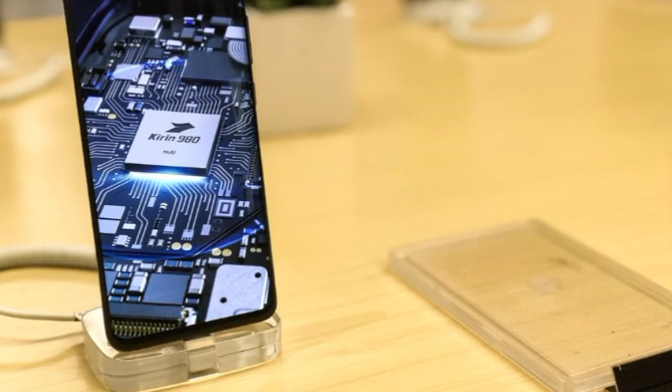In the later portion of Commerce Secretary Gina Raimondo's four-day trip to Beijing and Shanghai, Huawei Technologies Co. stealthily introduced a new phone dubbed the Mate 60 Pro on August 29, 2023.

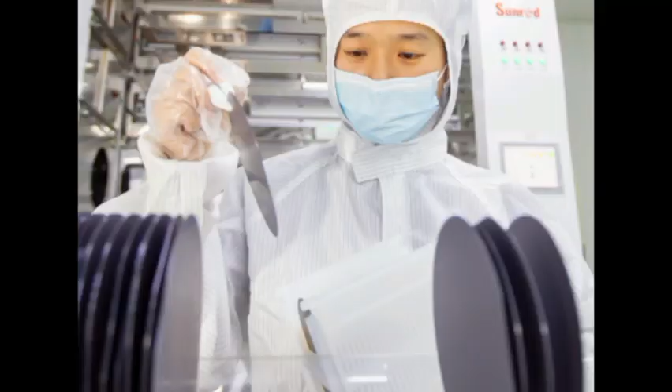A bombshell teardown of the Mate 60 Pro revealed that it was powered by a Kirin 9000 semiconductor chip manufactured in China by Semiconductor Manufacturing International Corporation. This meant China is able to produce 7-nanometer chips despite restrictions imposed by the United States, and possibly on a massive scale.

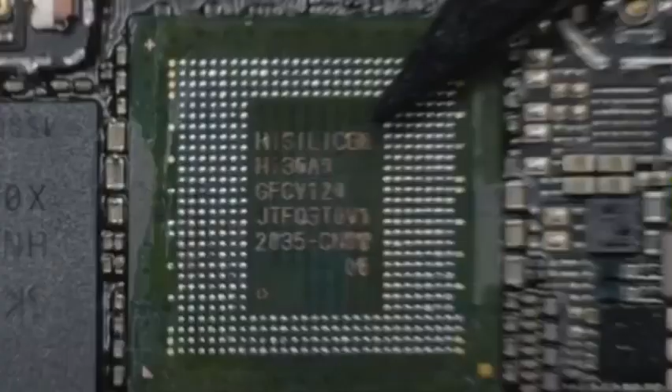Despite being introduced in a relatively unremarkable manner, the Mate 60 Pro went on to dominate the American news cycle the following week. Many in Washington concluded that the United States' efforts to restrict China's semiconductor development were fruitless as a result of this achievement, which caused widespread alarm.

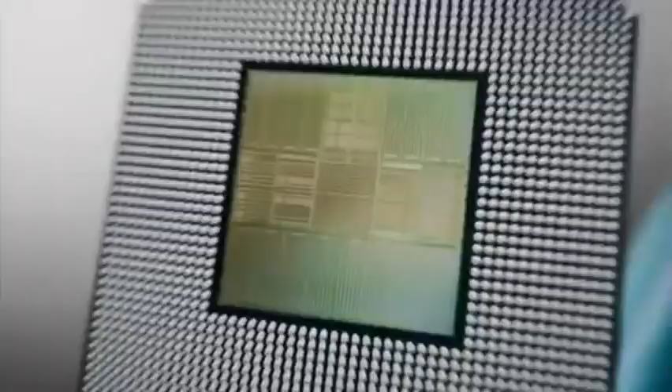In fact, the significance of the breakthrough made by Semiconductor Manufacturing International Corporation was considerably exaggerated. China was already well on its way to manufacturing 7-nanometer chips. It is more likely that Huawei's breakthrough will help recalibrate the Biden administration's approach going ahead than discredit it overall.

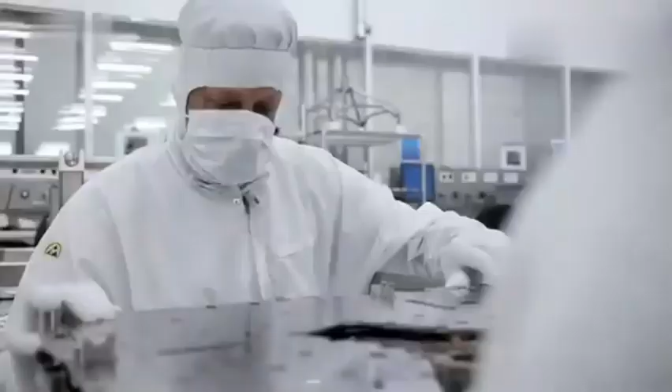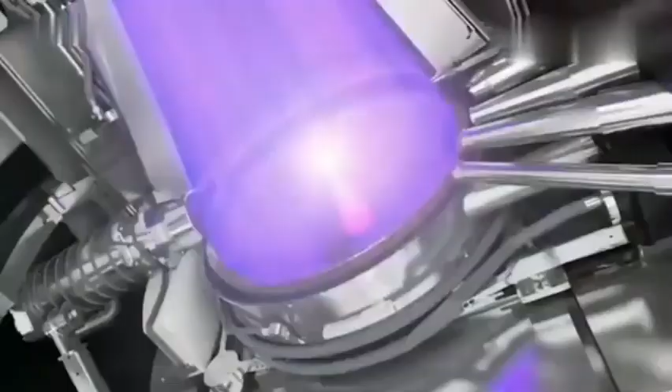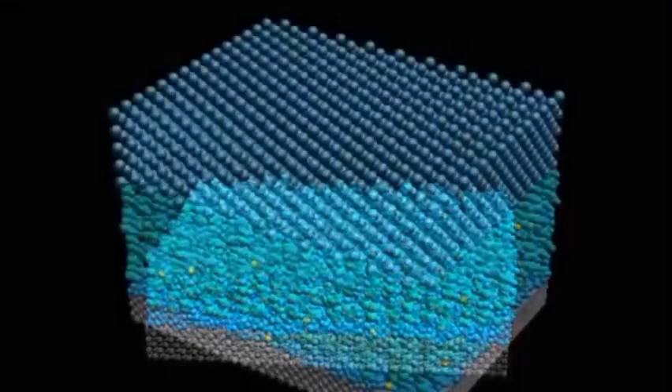To win the chip war with China, it is necessary to maintain a dominant position in advanced semiconductors, which are chips 8 nanometers or smaller, and to reduce reliance on Chinese legacy chips, which are devices 28 nanometers or bigger.

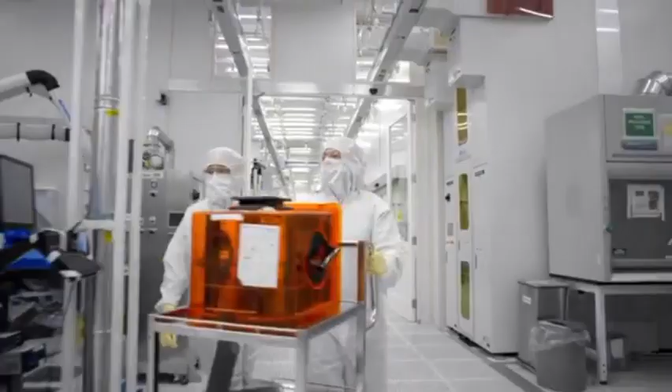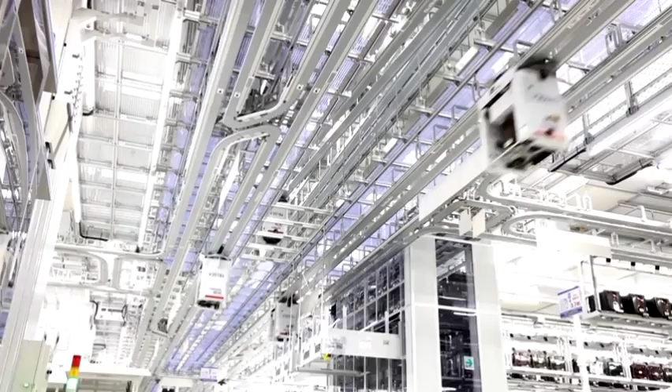Moreover, the United States government must keep an eye on China's increasing competitiveness in the legacy chip industry and formulate a response to it. Furthermore, if policymakers decide to further tighten chip restrictions in the near future, they should make certain these measures do not threaten the success of American semiconductor companies. What were the factors that led to China's breakthrough?

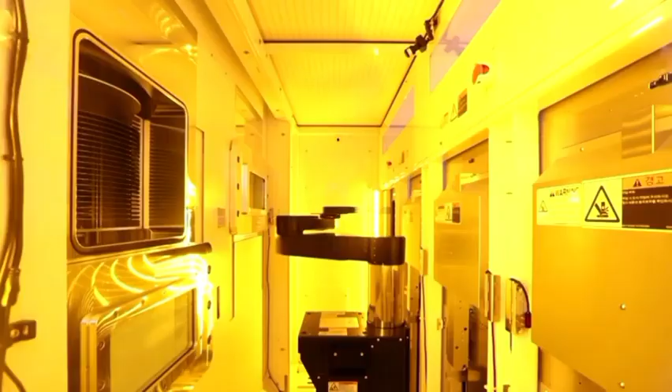In October 2022, the government of President Joe Biden imposed comprehensive export controls on China. These limitations prohibited the sale of specific advanced semiconductor chips, the complex equipment required to make them, and semiconductor expertise from the United States.

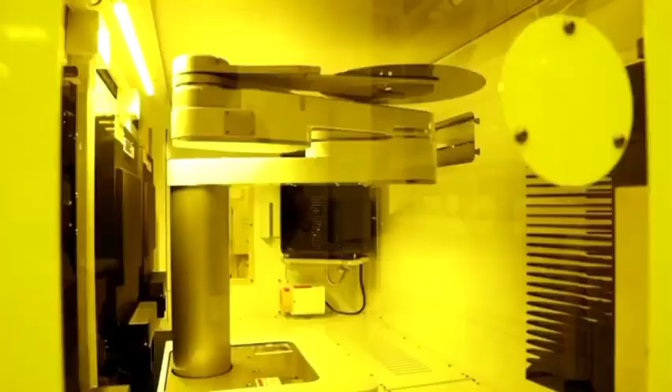In order to prevent China from developing a semiconductor suite at the 14-nanometer level, the United States implemented export controls. Specifically, the regulations included a threshold of 14 nanometers for logic chips and permits for exports to 14-nanometer and sub-14-nanometer semiconductor fabrication units in China. This effectively prohibited the sale of any items or expertise from the United States to these facilities.

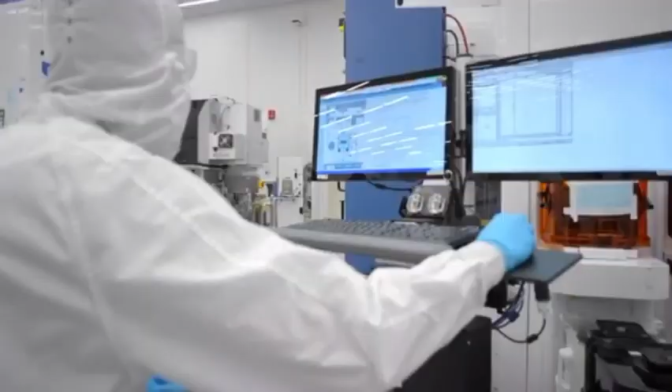On the other hand, this was an unattainable objective. To begin, Semiconductor Manufacturing International Corporation was able to reach its 7-nanometer breakthrough months, if not an entire year, prior to the implementation of export curbs on China by the Biden administration.

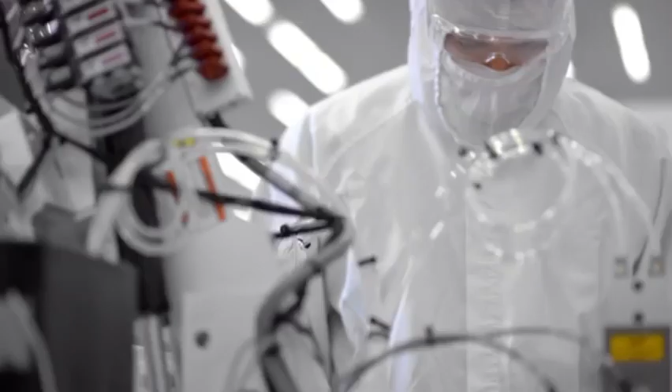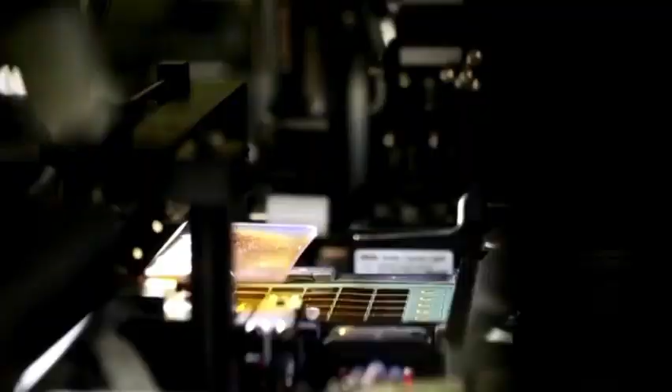The Canadian semiconductor analysis firm TechInsights concluded in a report published in July 2022 that the company had been able to manufacture chips with a 7-nanometer process since 2021. It was also determined they were able to speed up the transition from 14-nanometer chips to 7-nanometer chips in just 2 years, surpassing both Taiwan Semiconductor Manufacturing Company and Samsung in technological advancement.

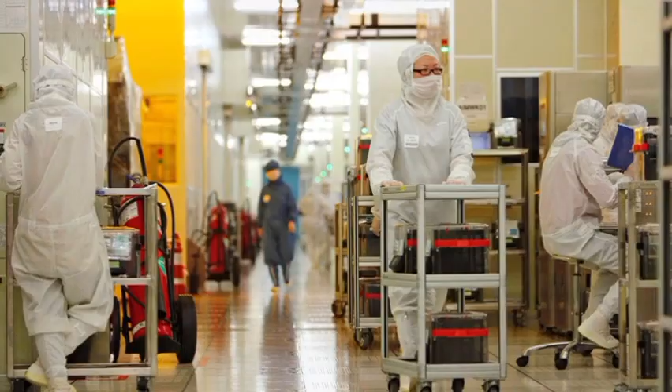Although this kind of leapfrogging is not very common, it is clearly conceivable. Liang Mong Song, currently co-CEO of Semiconductor Manufacturing International Corporation, was once an executive at Taiwan Semiconductor Manufacturing Company, the largest contract maker of semiconductor chips in the world. Under those circumstances, Liang was deemed responsible for leaking secrets to Samsung, including the technology behind the 28-nanometer process.

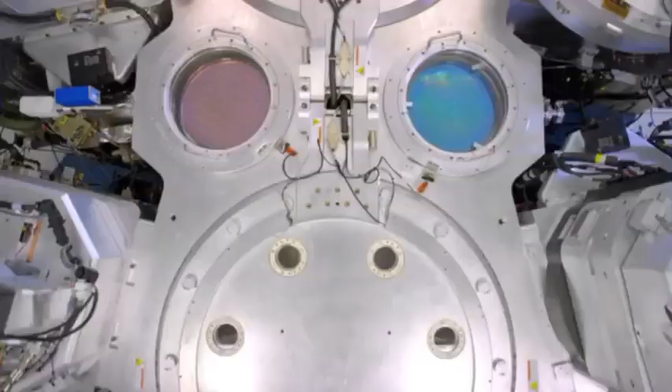TechInsights stated in their July 2022 study that there are many similarities in process technologies, designs, and innovations between SMIC's 7-nanometer process and TSMC's 7-nanometer process. This statement confirms the aforementioned point.

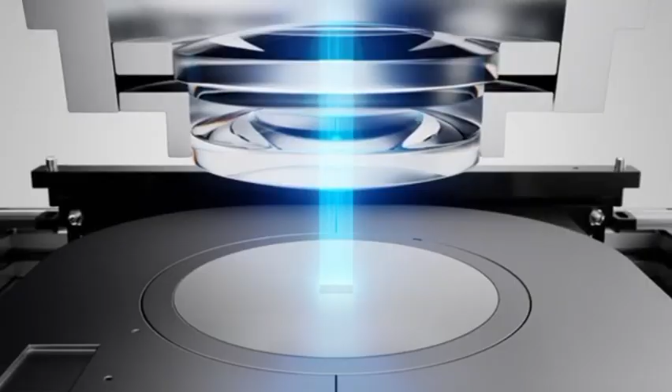In general, semiconductor companies have the option of employing either extreme ultraviolet lithography machines or deep ultraviolet lithography machines to accomplish fabrication of chips with sub-10 nanometer resolution. The most advanced of these devices is the extreme ultraviolet lithography machine, which is also the most expensive while being exceedingly advanced.

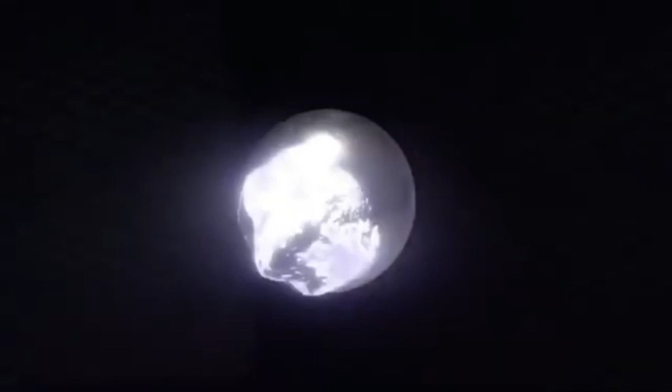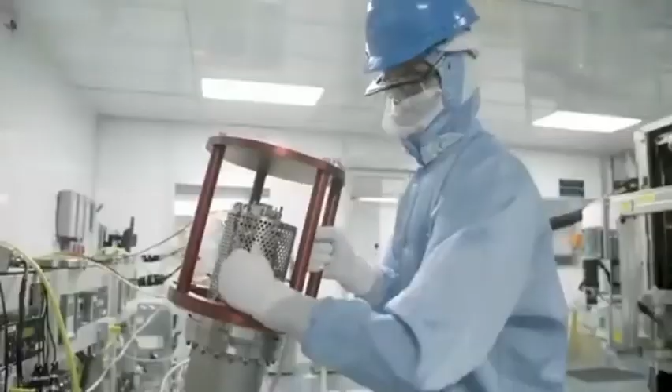The market for these technologies is likewise highly consolidated. ASML, a Dutch chip manufacturing equipment company, has a monopoly over extreme ultraviolet lithography machines and a near monopoly over deep ultraviolet lithography machines. Both of these machines are used for lithography.

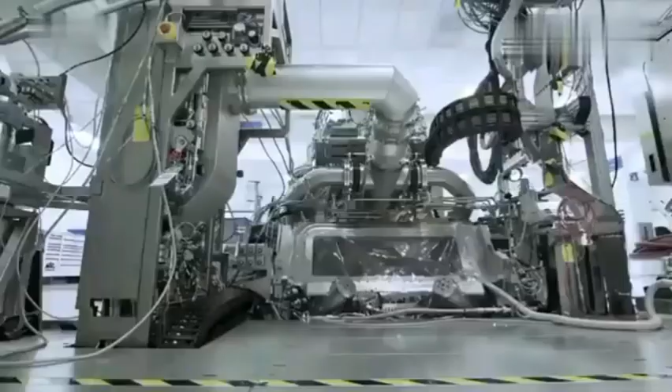Semiconductor Manufacturing International Corporation was able to create its 7-nanometer chips using chip-making equipment imported from other countries. However, since December 2020, when it was added to the United States Entity List, the corporation has been restricted from importing machines that use extreme ultraviolet lithography. Rather than relying on more modern extreme ultraviolet lithography machines, it was obliged to rely on less advanced machines to achieve its breakthrough.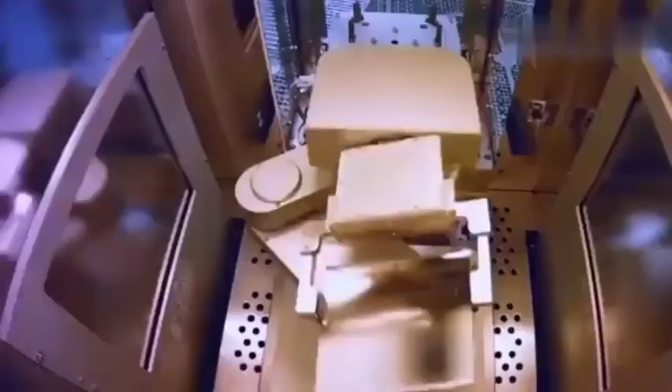The importation of deep ultraviolet lithography machines from other countries does not constitute a violation of the existing export regulations in the United States. The United States, Japan, and the Netherlands came to an agreement in late January 2023 to ban the shipment of advanced chip manufacturing equipment to China.

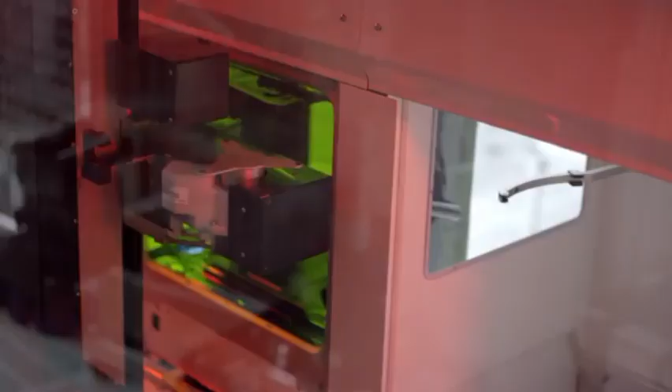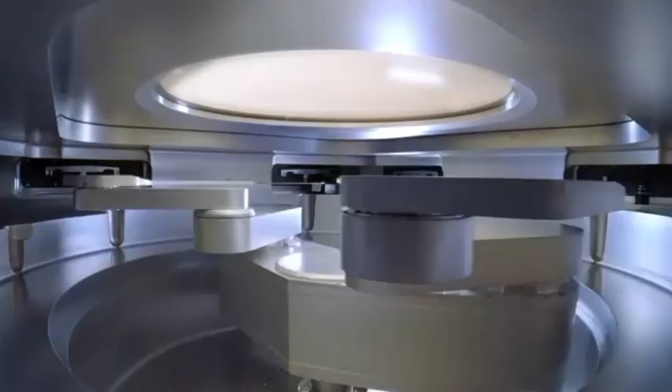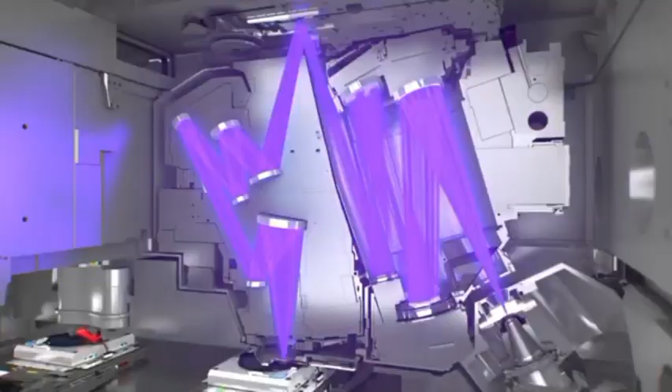Japan's rules went into effect in July 2023. Therefore, in order to manufacture the 7 nanometer Kirin 9000 chips for Huawei, Semiconductor Manufacturing International Corporation had the option of either using foreign deep ultraviolet lithography machines that were legally obtained prior to the October 2022 export controls, also known as a stockpile scenario, or manufacturing the chips in the 9 to 10 months that followed the controls, in accordance with new export controls in Japan and the Netherlands respectively.

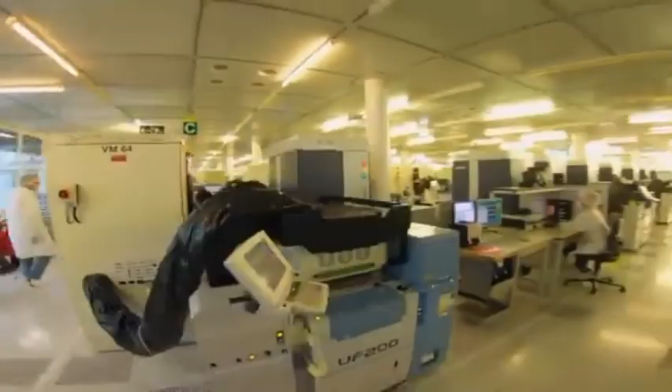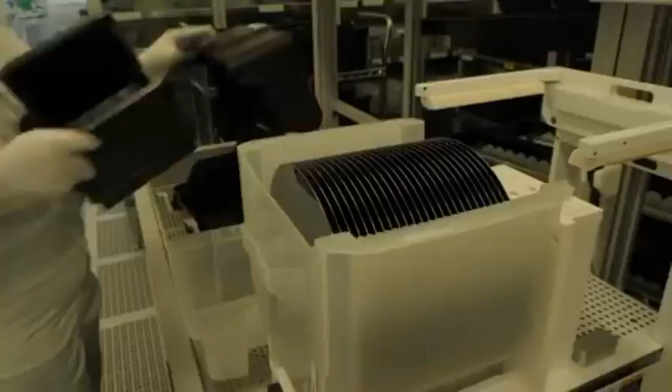A victory for the United States, not China. In light of the fact that SMIC was capable of producing 7 nanometer chips in 2022, if not 2021, with less sophisticated equipment, it was an unrealistic assumption to assume that the implementation of export controls, especially controls that were initially uncoordinated with allies, could result in the company's technological regression.

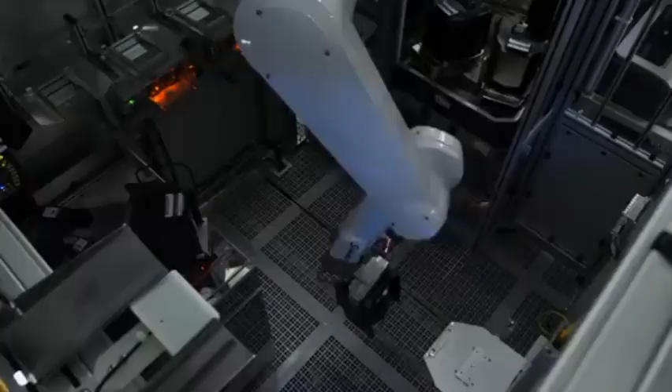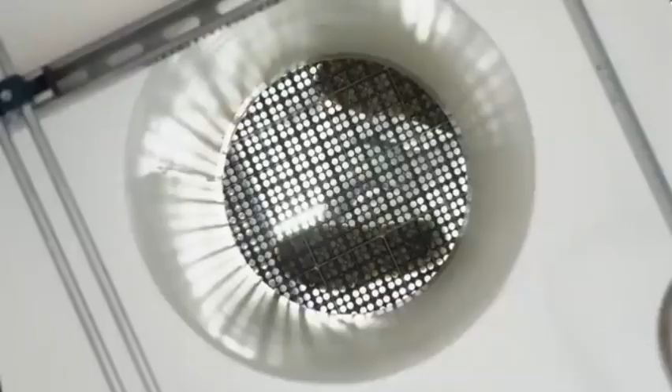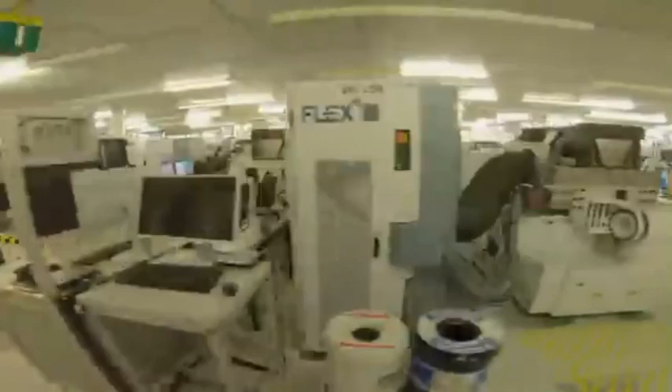It is quite unlikely that SMIC will be able to mass-produce 7 nanometer chips, despite the fact that the company absolutely possesses the capability to manufacture these devices. This is demonstrated by the fact that the Mate 60 Pro can be purchased - but it appears the phone was only available in restricted quantities, which suggests there was a limited inventory despite the fact that it was sold out practically quickly.

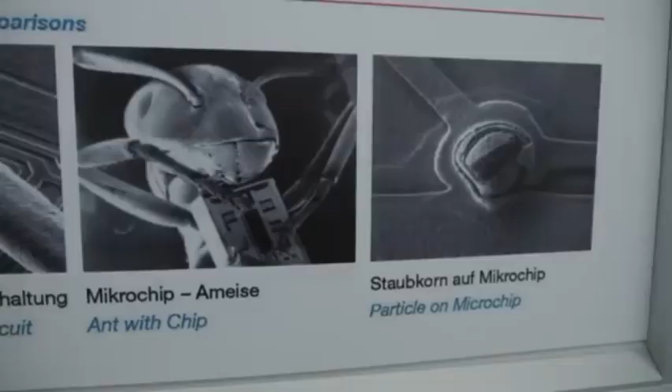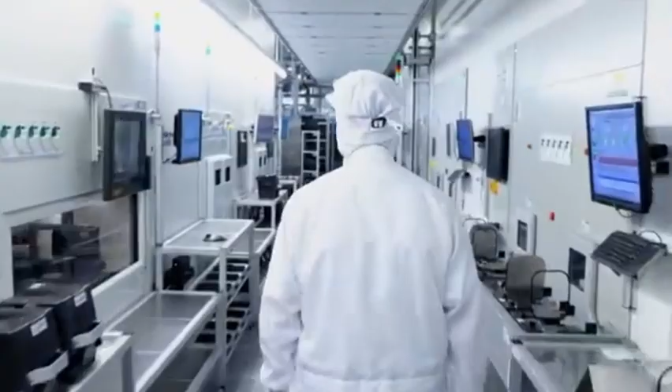Analysts at Jefferies believe that SMIC is only capable of producing a very small volume of 7 nanometer chips, and that Huawei may be powering some Mate 60 Pros using chips that were stored by TSMC before the implementation of export controls in the United States in 2020. The incorporation of these accumulated chips is unquestionably feasible.

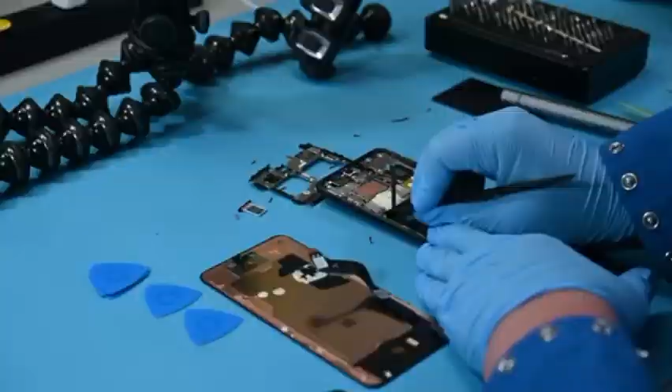The Mate 60 Pro was reportedly equipped with NAND flash memory chips manufactured by SK Hynix, a South Korean chipmaker that had previously halted chip deliveries to Huawei following the imposition of US sanctions. This information was reported by several early users of the Mate 60 Pro. In the meantime, SK Hynix has initiated an investigation into the utilization of their semiconductors in the recently released Huawei phone.

Analysts are currently attempting to gain an understanding of the yield, or efficiency, of China's 7-nanometer chip production in relation to the chips that SMIC did manufacture. Taking into consideration that the 7-nanometer chips TechInsights analysts have evaluated are in good condition, some research firms anticipate the manufacturing process yield rate will be below 50%, while TechInsights analysts predict it will be above 50%.

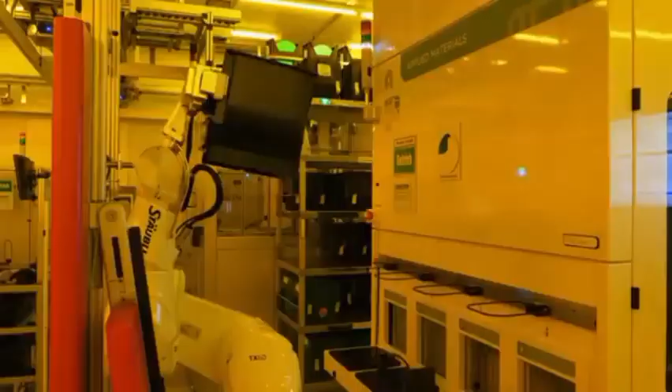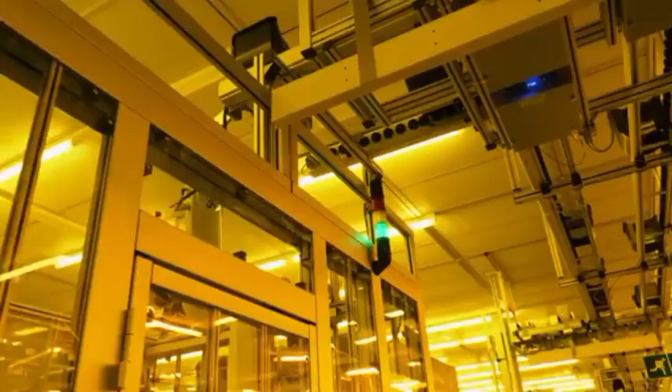Both yields, on the other hand, are extremely low when compared to the standard in the business, which is at least 90%. In light of the fact that China was able to make 7-nanometer chips prior to the implementation of export limitations by the United States, it may be deduced that SMIC had the intention of increasing its 7-nanometer yield at the time that the controls were implemented.

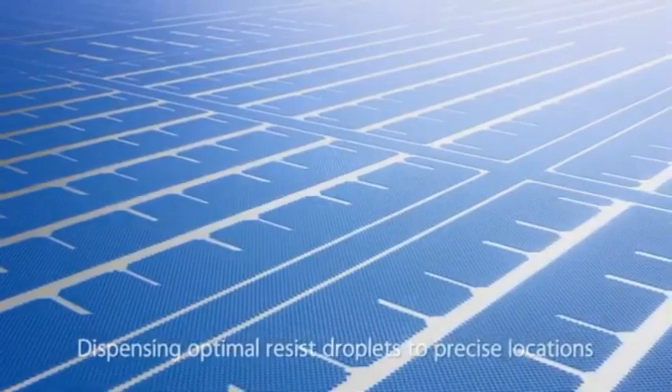It is a victory for the United States, not for China, that there is evidence of even slight progress in this area. In a nutshell, the development of Huawei's chips does not necessarily indicate that the export regulations of the United States are collapsing. Although the capacity of SMIC to eventually scale up manufacturing to 7 nanometers was never guaranteed, it was always a possibility even though it was never guaranteed.

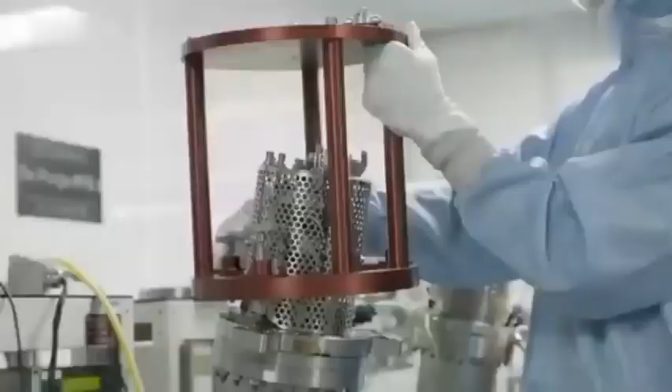This is especially true due to the fact that the co-CEO has a history of leaking trade secrets, and the fact that the company had relatively unrestricted access to chip-making equipment from Japan and the Netherlands for several months after the United States implemented export curbs in October 2022. SMIC is focused on trying to scale production at 7 nanometers, and China has asked Raimondo to lift export limits.

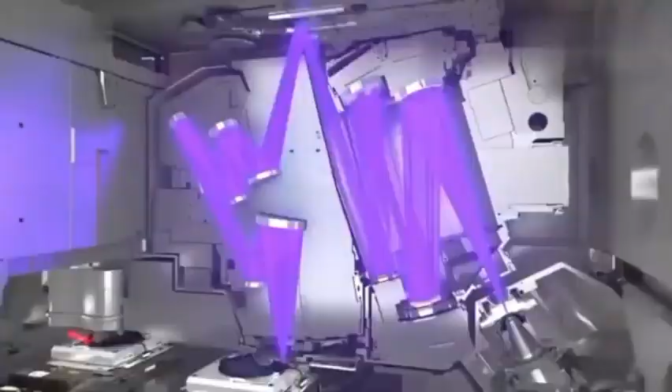Instead of bemoaning the defeat of US chip sanctions, lawmakers in the United States should be delighted with these developments. If, for instance, the corporation were to pursue the fabrication of chips with a 5-nanometer process today, the situation would be much more concerning. China is barred from obtaining extreme ultraviolet lithography machines from ASML, which is the only company in the world that manufactures these machines.

This means that even if China is discreetly pursuing the creation of chips with a 5-nanometer process at the moment, it is almost certainly impossible for China to make chips with a 3-nanometer process.